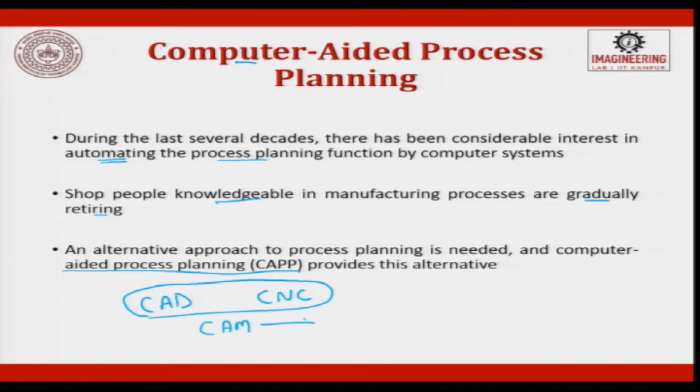Slowly it was also becoming costlier to have knowledge based people in the industry, and they were also getting gradually aged. So the alternative for manual process planning is computer aided process planning, CAPP. CAD started evolving, then slowly CNC started evolving. Now people have started integrating these two, and they started talking about CAM, and in CAM one of the verticals is CAPP.

The manufacturers have been pursuing an evolutionary path to improve and computerize process planning in the following 5 stages. These are the 5 prominent stages which have evolved over a period of time.

In stage 1, manual classification started. You had so much data, so you had to do a cluster algorithm of that data. So what do you do? You try to cluster them based upon shape, size or aspect ratio. You started classifying the data you had, and then for each classified data you started establishing a standard process plan or procedure.

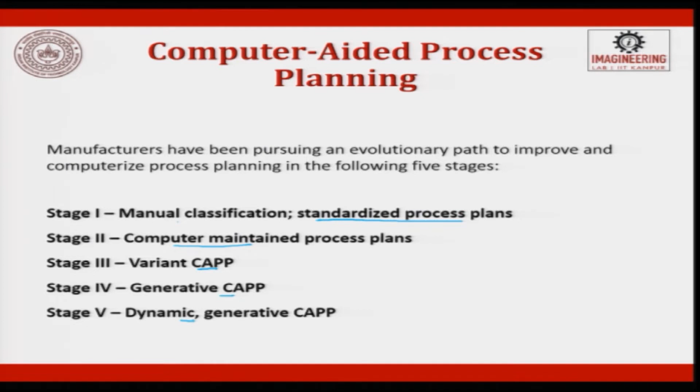So stage 1 was manual classification going on, and for each classification they established a standardized process plan. Then computers were used only for maintaining that data, to store and retrieve it. Then slowly software algorithms started developing. The first step was leading towards variant process planning, the next one leading to generative process planning, and the last stage is dynamic and generative computer aided process planning.

In manual classification, standardization is the process. What I am trying to explain is, you have a y axis and x axis, and so much data. These data are nothing but different machining processes, and some parameters you can consider.

Now what do I do with this data? I try to classify the data and form clusters. When I form these clusters, there is a similarity amongst them. So this is cluster 1, maybe turning operations, this is drilling operation, and this is cluster 2. So this is what is manual classification of the data, and how did you classify them? You looked into the data and then grouped them.

Prior to CAPP, manufacturers attempted to overcome the problems of manual process planning by basic classification of the parts into families. I always used to give this example to my students.

Suppose you go and buy vegetables from a market along the streets or in a village. What we do is get everything in a big bag, come back home, and then start classifying them according to shape, size, aspect ratio, color and touch. We classify them into several families. For example, all tomatoes put together, all potatoes put together, all onions put together. Now all onions are stored, and the processing for onion is established separately, which is not going to be the same as cutting tomatoes.

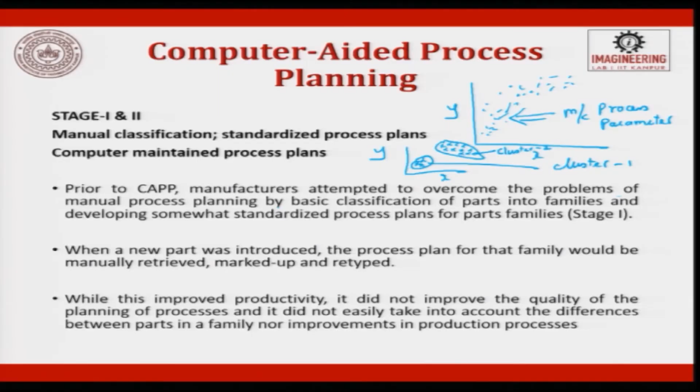So, now individual process plans are established for each vegetable. So, that is what we have done. So, manual process planning by basic classification of parts into families and developing a somewhat standardized process plan for that particular family. So, for all onions, for all potatoes, for all tomatoes.

So, let us do a similar analogy here. For all cylindrical parts we try to do turning, all prismatic parts we try to do milling, for the hole generation process you do drilling, and if the tolerances are high you do drilling and boring. So, that is what it is. For example, you have threads, internal threads, external threads. Internal threads, if you want to do them on a cylindrical shaft, use a lathe machine.

So, now what have you done? Looking into the part feature, you have classified, and the machining process is also established. Now, the standard is established. Now, looking into your tool availability, workpiece availability, machine status, you try to decide what are all the process parameters you have to use.

So, the standardization of process is nothing but the turning operation, and tweaking to individual requirements will be done by a manufacturing engineer at the shop floor. But he at least knows, or he is at least given a lead, that there is a standard process established for cylindrical shaft internal threading.

Okay. So, you have now established all these things. When a new part comes, the new part is now having varying hardness, varying diameter, tool size might vary, tool angles might vary. So, now what we do is the process plan for that family would be manually retrieved, marked up and retyped, plus it will also be edited to meet the requirements. So, you will pull that up, look into the algorithm, fit in your data values, and then you try to make this a standard established in your routing sheet.

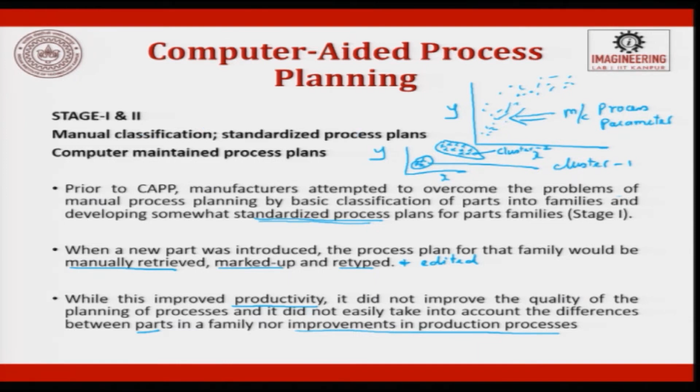So, this is why from manual classification and standardizing, we are looking for the third stage to evolve in computer aided process planning. In the third stage, the initial computer aided approach evolved into what is known as variant CAPP. What is variant CAPP? Variant CAPP is nothing but the process plan is already given. This is the basic, and now what I do is I try to do some variation like changing speed, feed, depth of cut, okay.

And suppose you have one drilling machine which is CNC, now you want to change it to an automated machine or you want to do it manually. These are some of the changes which you do on the master process plan to meet your requirements. These are variations which we do on the process plan to meet the requirements. The variant is based on group technology. What is group technology? Group technology is nothing but the family what you did, grouping of similar things based upon shape, size or manufacturing process.

Group technology coding and classification approach. So, what is coding and classification? For example, let us take your roll number. Your roll number is maybe 16 12 003. So, what is this? This is your roll number. So, a roll number in a factory is called the part number. So, how do you decide the part number? That procedure is called coding.

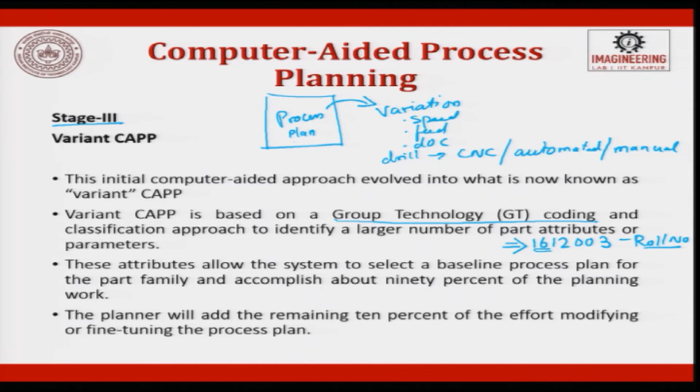So, here if you look at the roll number, we can easily say, okay, you are Y16 batch, that means you joined the college in 2016, then you joined in the first semester, and 2 is maybe that you are an undergraduate, or this 2 can be your department, maybe electrical engineering, and you have a roll number in the class of 3.

So, now what I have done is I have taken some Ram, Sham, anybody, and I have coded him into a number which is called a roll number in your college, and when it goes to a factory it becomes a part number. Okay. Establishing this code is called coding. It is not the computer program, but establishing a number for an individual part is coding.

When you go to a part number in a factory, by looking at it they will quickly try to say whether this part gets into engine assembly and what is the current status of the part. So, the group technology coding does that for us. So, a variant CAPP is based on group technology coding and classification.

Classification, I have already told you, is an approach to identify a large number of part attributes or parameters. These attributes allow the system to select a baseline process plan for the part family and accomplish about 90% of the planning work. So, 90% is given here and only 10% tweaking will be done. The planner will add the remaining 10% of the effort modifying or fine tuning the process plan.

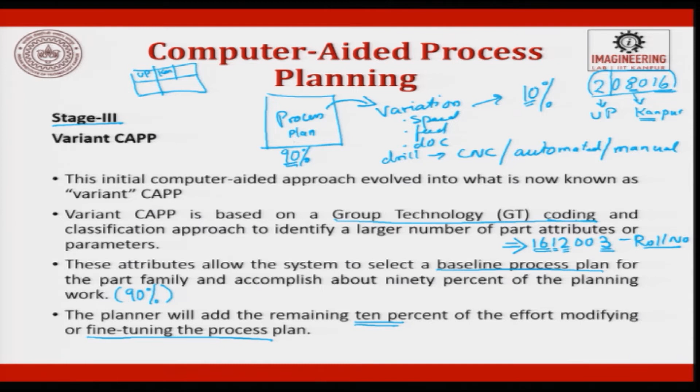When a new letter comes, what happens? It is easy for the postmaster: rather than looking into the whole address, he just looks at the pin and classifies. That is what is done by group technology coding and classification. The moment it is coded and classified, 90% of the data is given and the planner has to work only on 10%. So, he reduces his time, there will be no mistakes, and there will always be scope for improvement. The fourth stage is going to be generative CAPP.

So, in variant CAPP, there is a part family, and for that part family there is a well established process plan. Okay. In generative type CAPP, I know the basic knowledge. For example, let us assume you are driving a car. You know the function of a steering, an accelerator, a brake and a clutch, and you know what the gear is supposed to do for you while you drive. So, all these basic things are known. Depending upon the road conditions, you keep playing with these three pedals, steering and gear to meet the requirements. So, this is the generative type.

So, in the generative method, all the basic tables are established and there is no fixed program already given. Based upon the input data, these are decision tables. Based upon the table, you take a call and develop a process plan. So, what is the advantage? Rather than saying if you are driving in a street like this, use this, you just say, I am teaching you all the basic conditions, you are aware of all the basic conditions, now coordinate between the three decision tables and come out with a process plan.

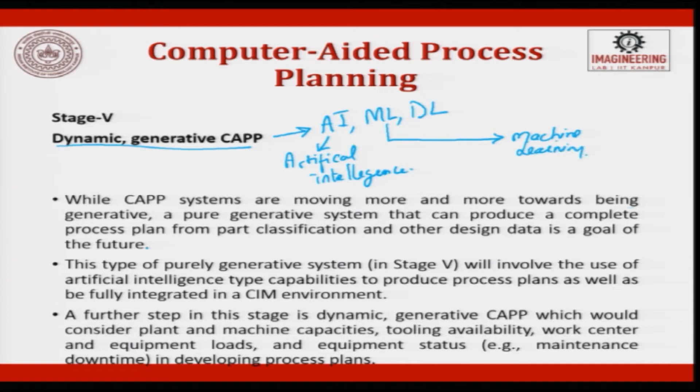So, this is nothing but using AI, ML and DL: artificial intelligence, machine learning and deep learning. These are the buzzwords which are now talked about more in manufacturing. When we are looking at CIMS, a computer integrated manufacturing environment, these techniques are nowadays exhaustively used in process planning.

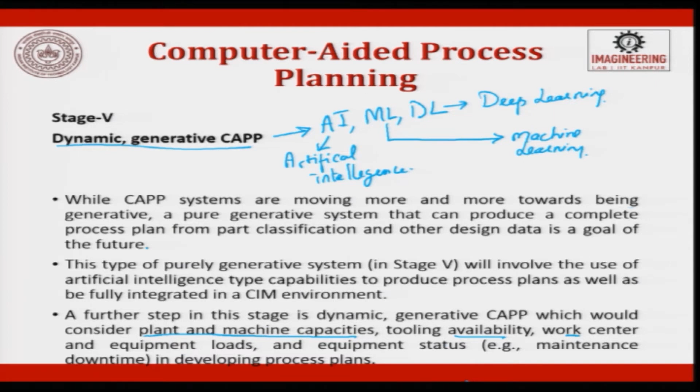A further step in this stage is dynamic generative CAPP, which would consider plant, machine capacities, tool availability, work center, equipment loads and equipment status in the developing process. Dynamic generative CAPP also implies the need for online display of the process plan on a work order oriented basis to ensure that the appropriate process plan was provided to the shop floor.

So, here when we talk about dynamic, we are trying to keep the customer requirement also, customer requirement and the current loading of the factory. Loading of factory means what are all the machine loads and how are these done. So, we start looking forward to optimizing machining center usage, tight integration with the manufacturing resource planning system.

So, we are now trying to integrate the shop floor with your office, where they are involved more in sales and service. So, this interaction is going to happen. Now, why is this important? Looking into the shop floor, looking into the availability of the machine, looking into the availability of the parts.

Now, you try to talk to the office of sales and say this is possible, this is not possible, and the moment they say why don't you do this, then immediately the shop floor should be able to tweak the part program and the availability of the tools such that they meet the requirements. So, tight integration with the manufacturing resource planning system is needed to track shop floor status and load data and assess alternative routing vis-a-vis the schedule.

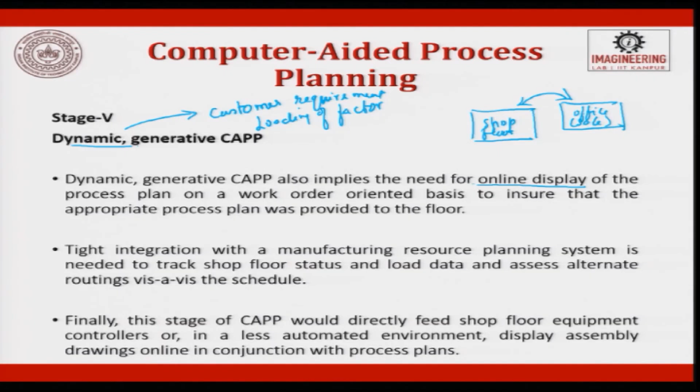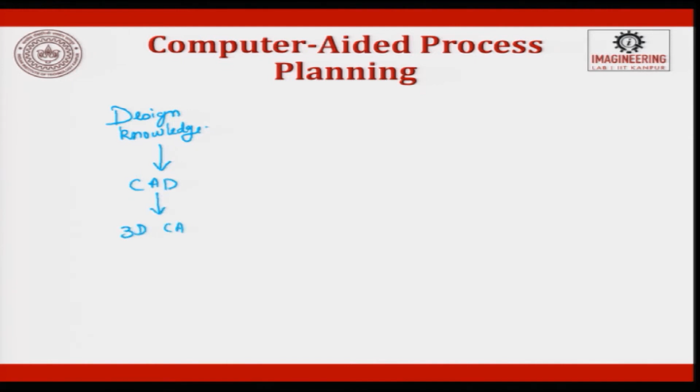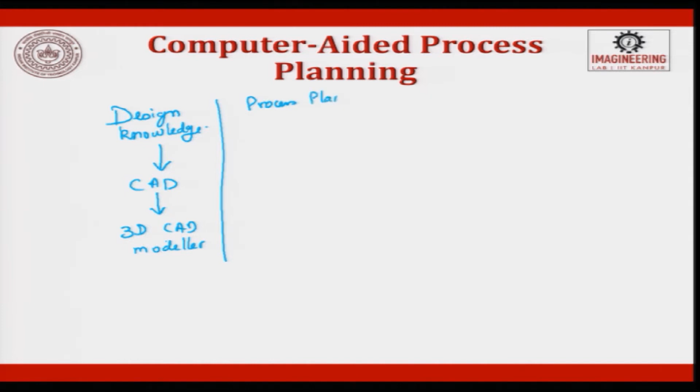So, if you want to put computer aided process planning in a schematic diagram, we have design knowledge, this leads to the CAD system, and this goes to the 3D CAD modeler. Okay. So, this is one vertical. Next is process planning knowledge. This will lead to CAPP, computer aided process planning, and this gives you a process plan.

The other one is manufacturing knowledge. This goes to CAM and this goes to NC code. So, these are the results, and the top one is the knowledge base. So, design knowledge, process knowledge, manufacturing knowledge leading to CAM, process planning to CAPP, and design knowledge to CAD. So, from here the modeler, process plan and NC code we generate.

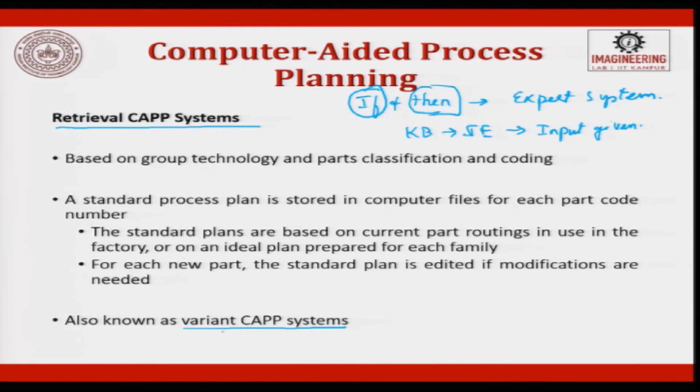A standard plan is based on current part routing in use in the factory or an ideal plan prepared for each family. For each new part, the standard plan is edited if modifications are needed, also known as variant CAPP. Retrieval, otherwise known as variant CAPP, is almost the same. The system logic involved in establishing a variant process planning system is relatively straightforward. It is one of matching a code with a pre-established process plan maintained in the system.

Many a times when you go to a textile shop, a cloth shop, you say, here is a cloth I have, can I get a similar color cloth? So, immediately the person keeps the cloth you have given him in his left hand or right hand, goes to the shelf where similar colors are identified, places it beside each other and then tries to pick up the closest match and says, please sir, see this.

So, this is the way variant CAPP also works. You have given something, the computer will quickly try to match it with an already existing one, and whichever closely matches, it pulls out from its library function and displays it in front of you. The initial challenge is in developing the GT classification and coding. How do you classify it?

Because the textile cloth example was easy, but in a factory you have to establish a coding system. So, you establish a coding system and there are several codes already there. Each code is nothing but a part number, each part number has a process plan, you just pull that out and start using it. So, the initial challenge is in developing the GT classification and coding structure for the part family and in manually developing a standard baseline process plan for each part family. Initially it will be difficult, then on it becomes easy. The first time you have to establish it, there it is a challenge.

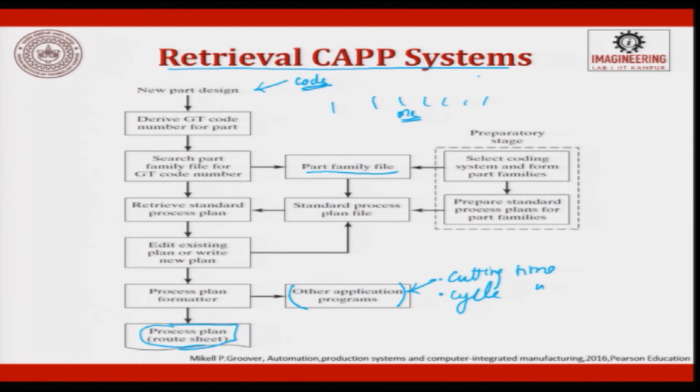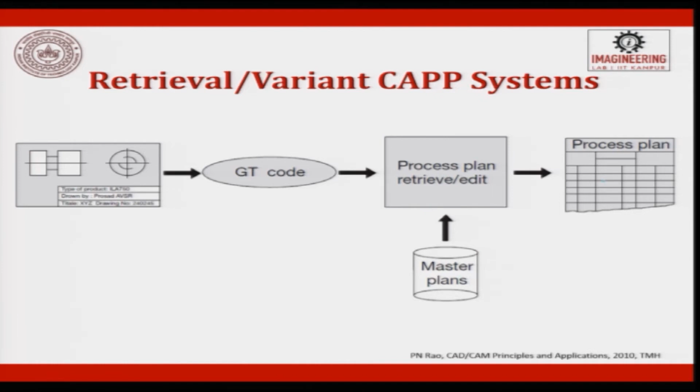So in a retrieval CAPP system or a variant CAPP system, you can see a new part coming, a GT code getting established, a process plan retrieval is done, a process plan is retrieved. When you start doing this process plan retrieval and editing, you pull out something from the master plan and then you start editing, so that you try to meet the existing part's requirements.

If the file does not contain a standard process plan for a given code number, the user may search the file for a similar code. I do not get the exact code, but now what I do is I look for a similar code. So now a similar code number is taken out, you edit it to your requirements and finally you make a formatter.

The formatter may call other applications like determining the cutting conditions, calculating the standard time, computing cost. All these things will be done and finally you will try to give the generative CAPP gives the final option.

So in generative type, what happens is, rather than retrieving and editing an existing plan from the database, the process plan is created using a systematic procedure that might be applied by a human planner.

This is what I said, driving a car. You have been taught to drive a car, the logic is told, the inputs given. Now depending upon the situation, you try to maneuver and play with it and try to do it. In a fully generative CAPP system, the process sequence is planned without human assistance and without a predefined standard plan. So here there is no set condition told to you, but the logic is taught to you.

Designing a generative CAPP system is a problem in expert systems. Expert system variant retrieval works on the logic of if and then. If you have a new product and if you can somehow understand the new product and put an if condition, then it comes. Expert systems work exhaustively well in the variant and retrieval system.

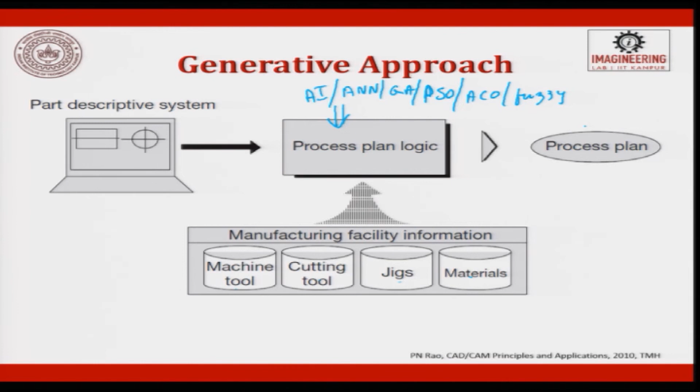The first key to implementing a generative system is the development of a decision tree appropriate for the items to be processed. Decision tree - this is what I told you, we teach you the basics. These decision rules are specified under a decision tree, a computer language involving logical if-then type statements, or artificial intelligent approaches with object oriented programming. This is what is called OOPS, object oriented programming, which is exhaustively used in database software.

Why? Because you have so much data, how are you going to logically store it such that the program can quickly work, retrieve, and bring you the output.

The nature of the part will affect the complexity of the decision rule of generative planning and ultimately the degree of success in implementing the generative CAPP system. The majority of generative CAPP implementations to date have focused on process planning for fabrication of sheet metal parts and less complex machined parts. It is still evolving; generative CAPP has not reached its maturity.

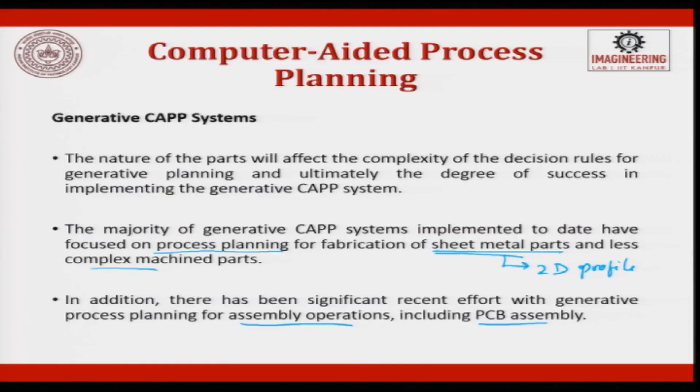There has been significant recent effort with generative process planning for assembly operations, including PCB assembly. Sheet metal is so prominent because it involves 2D profiling. Its thickness is too small, and along the thickness there is no variation, only in x and y can there be profiling or geometry. Whereas when you machine a 3-dimensional object, there is variation along the z direction, which makes life more complex for generative type. So it is exhaustively used for sheet metal and PCB assemblies.

The second key of generative process planning is the available data related to the part to drive the planning. Simple forms of generative process planning systems may be driven by GT codes, so GT or Features Technology (FT) type classification, with or without numerical code, may be used to derive CAPP. This approach would involve the user responding to a series of questions about the part. Based on the answers, what comes out is a generative CAPP that eventually works on feature-oriented data captured in a CAD system during the design process. This data can directly drive CAPP.

In CAD, I was also talking about feature recognition. So if there is a feature - eye is a feature, nose is a feature, mouth is a feature - for each feature there is a process plan already established. When you put this entire object into a CAD system, it quickly extracts that data, then goes to the feature-based process plan which is already there in logic. It pulls out all those things and tells you the best process plan to use. This is generative type process planning, and there is a hybrid which is semi-generative CAPP, in between variant and generative.

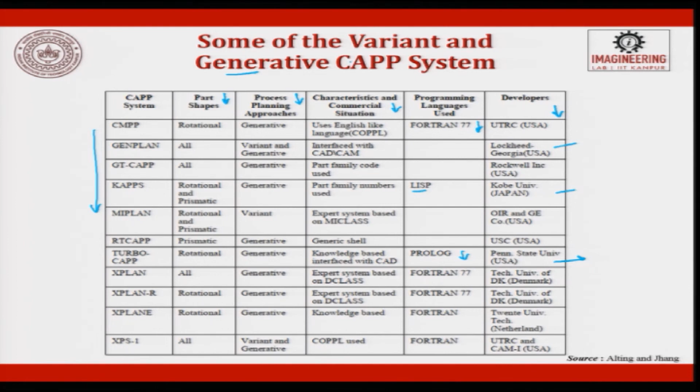The CAD/CAM integration and CAPP features is a frequently overlooked step in the integration of CAD and CAM, which is process planning. A CAD system generates graphically-oriented data and may go so far as graphically identifying metal to be removed during the process. In order to produce such things as NC instructions for CAM equipment, basic decisions regarding equipment to be used, tooling, and operation sequence are to be made. This is the function of CAPP.

So we are talking about CAD, we are talking about CAM, and we are talking about the function of CAPP. Without some elements of CAPP, there would not be such a thing as CAD-CAM integration. Between CAD and CAM, CAPP is the biggest vertical which has to play a role in understanding the drawing and converting it into a manufacturing part.

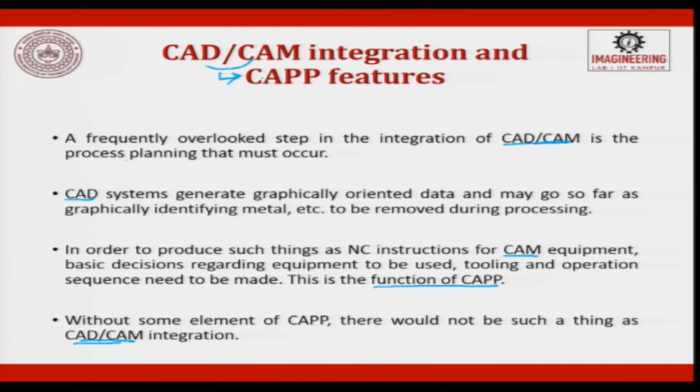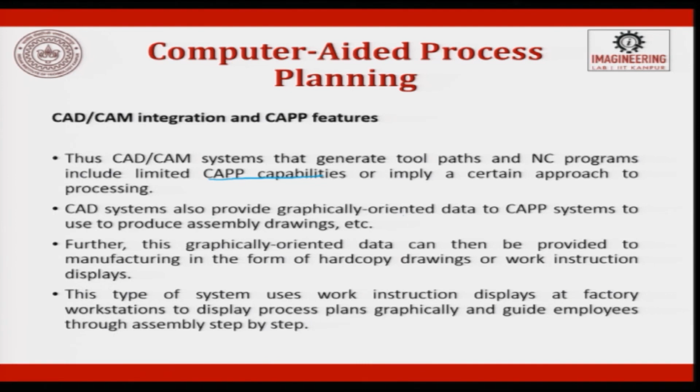CAD-CAM systems that generate tool paths and NC programs include limited CAPP capabilities or imply a certain approach of processing. The CAD system also provides graphically oriented data to the CAPP system, used to produce assembly drawings. This graphical orientation data can then be provided to manufacturing. So this is how CAD and CAM are integrated by using CAPP.

So the function of CAPP is that it gives you a synergy result when CAPP is integrated with the CAD/CAM system. So CAPP becomes a direct connection between design and manufacturing.

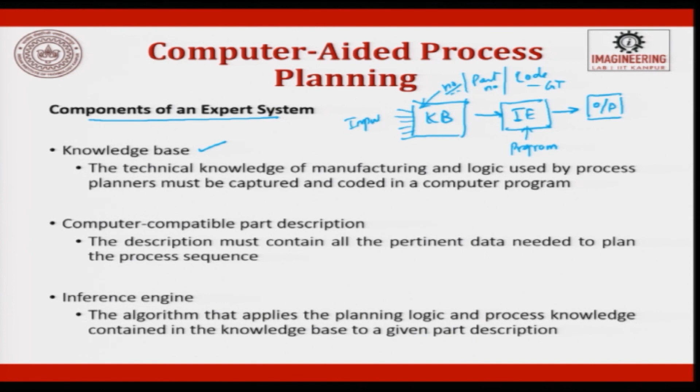Then inference engine. Knowledge base: you collect data from all sources, these are inputs, and this is where the knowledge base is stored. Then inference engine: here you write a program, software, and then what you take out is the output. The algorithm that applies the planning logic and process knowledge contained in the knowledge base to a given part description is done in the inference engine. And then finally you get the output.

What are the benefits of CAPP? Process rationalization and standardization happens. Because of that, you do not have to store many part numbers, but now you will store only fewer part numbers, so you can quickly retrieve the data and edit it to meet your requirement. CAPP leads to a more logical and consistent process plan than traditional process planning, where every part number would have its own sequence, occupying a huge database.

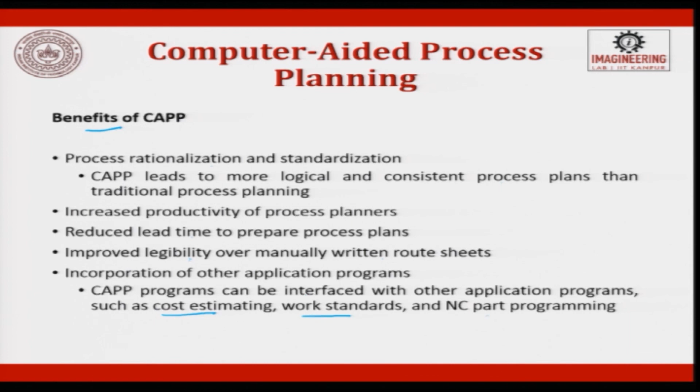So, when there is a huge database, errors are prone to happen, the storage space becomes large, the retrieval becomes difficult, and then you need a huge server space to use it. So, increasing productivity of the process planner can happen by using CAPP, reduced lead time, improved legibility over manually written route sheets, and incorporation of other application programs can be integrated with CAPP, so that you can do cost estimation, work standards and an NC part program.

In a detailed survey of 22 large and small companies using generative type process planning, there was a 58% reduction in process planning efforts, 10% in labor cost, 4% in materials, 10% in scrap, 12% saving in tools and 6% reduction in work in process.

Work in process is nothing but the part moving between one station and the other station. From the start before the end, the parts which are lined up are called work in progress, which cannot be sold, but exist in your factory, and also cannot be stored in terms of inventory. It is in between. Inventory can be a semi-finished process or a part.

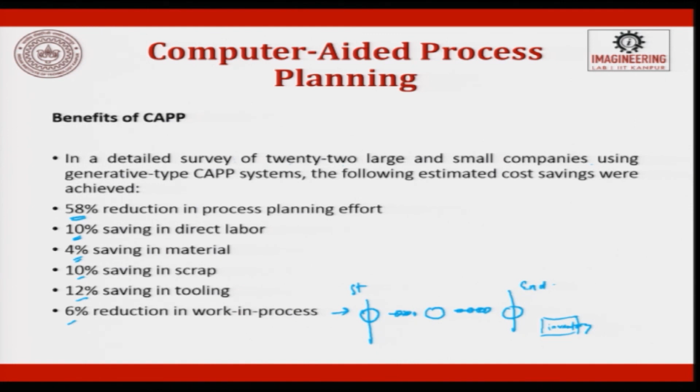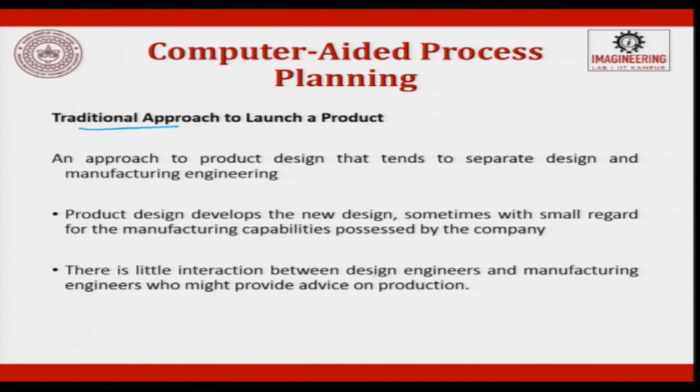Benefits of CAPP. So, the traditional approach to launch a product was an approach to product design that tends to separate design and manufacturing engineering. The product designer develops a new design, sometimes with small regard for the manufacturing capability possessed by the company. There is very little interaction between the design engineer and the manufacturing engineer. That is the traditional approach when a new product is launched.

The emphasis of planning for the future is distinct from process planning, because it is concerned with products being contemplated in the company's long term plans rather than products currently being designed and released. So, the emphasis of planning was further done at this stage. So, this led to advanced manufacturing planning, which attempts to forecast the new products that will be introduced in the 2 to 10 year future, also done by using CAPP.

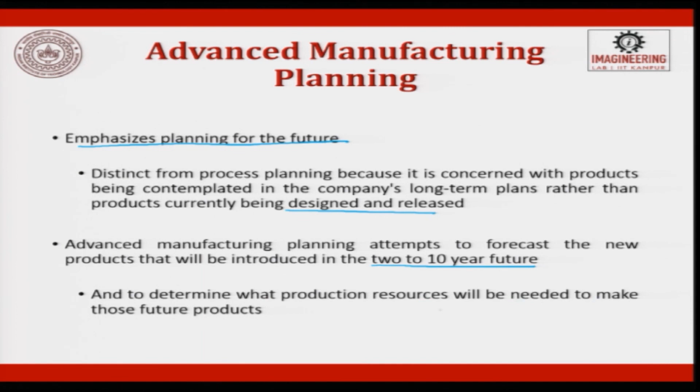So, how many new products have come? Based on the new products, I will understand, okay, the product life cycle is going to be short. So, I have to prepare myself for the next possible variations, and to determine what production resources will be needed to make those future products, we use manufacturing planning.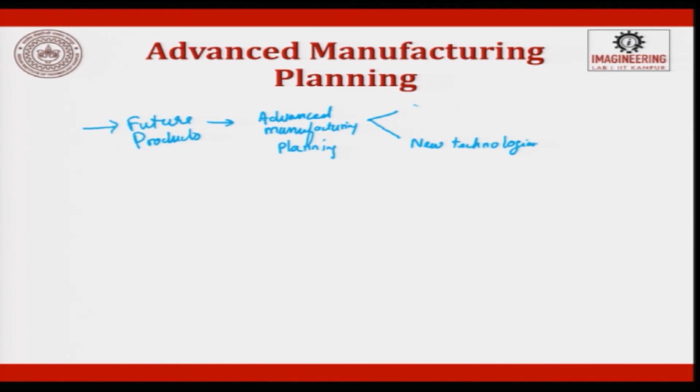So, in a schematic diagram, if I have to represent advanced planning, it will be future products, then advanced manufacturing planning. This has two classifications. One is new technology, the other one is existing manufacturing capability. Then this will give future manufacturing capability.

Okay. So, this advanced planning will look at new technology getting evolved, new technology evaluation, investment, project management, then facilities planning. All these things are done for the future, and then finally you will get manufacturing research. Okay. So, this is new product process strategy. So, you have all these data flowing like this.

So, advanced manufacturing planning today is trying to take all the new technologies, investment, facilities, manufacturing, what is the lead time, how the product is going to perform, what is the customers' feedback, all these things are getting integrated. Earlier we were talking about CAD and CAM, now CAPP comes in between. Now we are also trying to bring ERP, enterprise resource planning, into CAPP, and now CAPP is moving to the next era of dynamic CAPP.

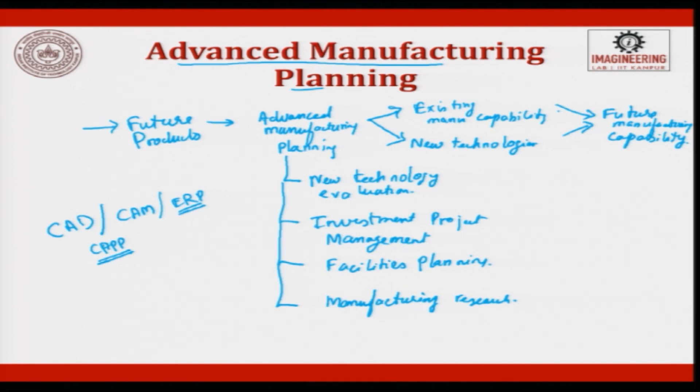So, it also looks at how the new products are going to perform, what is the technology, and how the old technology information is used to change. For example, as new smartphones keep coming, an individual quickly learns and then starts using the smartphone. In the same way, with CAPP, whatever already exists, people are using it. As and when the new thing comes, they learn it and start using it for futuristic requirements.

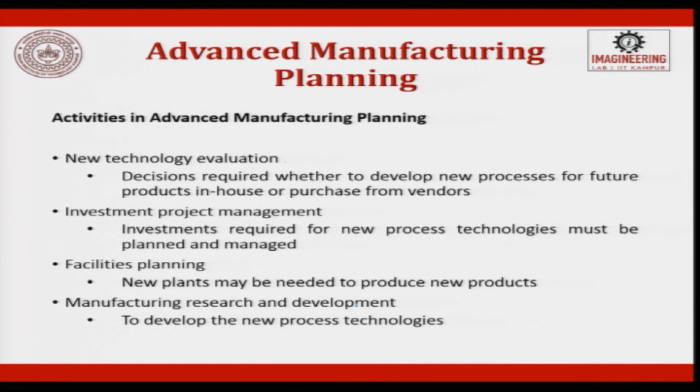So, in the activities involved in manufacturing planning, new technology evaluation will happen, and then you will have investment project management, facilities planning, and manufacturing research and development. So, all these are the activities in advanced manufacturing planning.

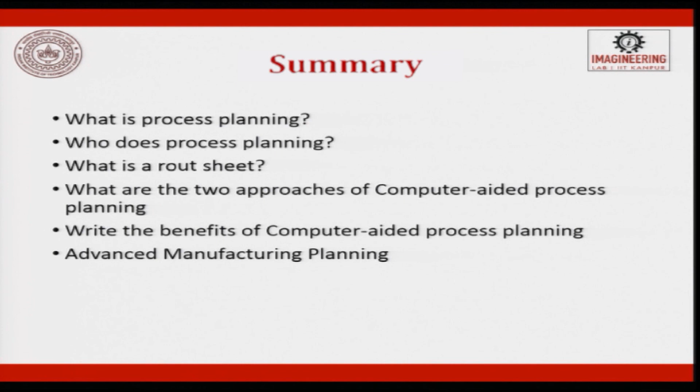So, to recap what we have studied in process planning: we studied what is process planning, who does process planning, what is a route sheet, what are the two approaches in computer aided process planning, what are the benefits, and to conclude, what advanced manufacturing planning is happening in the latest industries today.